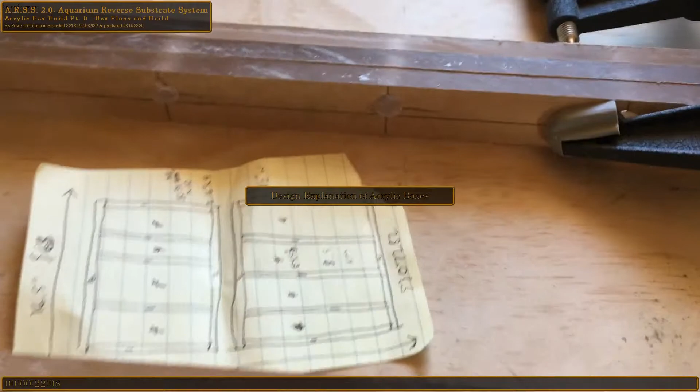Alright, A.R.S.S 1.0 failed. The silicone seams busted on the aquarium, most likely when I put in the city water, which is 90 psi, and then a new motor turned on at the same time. It basically broke the silicone at the edge of the glass in several places, not the actual aquarium glass, but where I siliconed the screen mesh. Go back to the other videos if you want to know what that was - the first video should show you what that looked like.

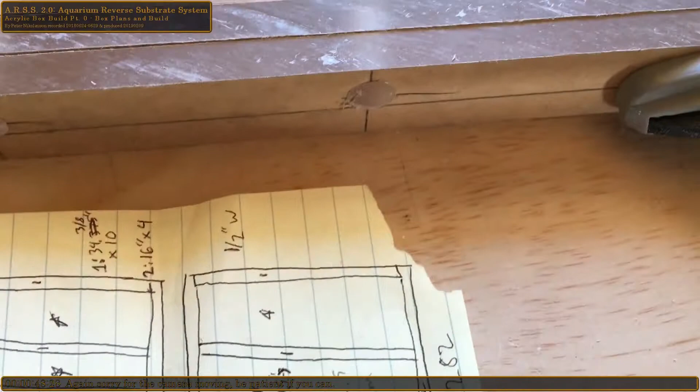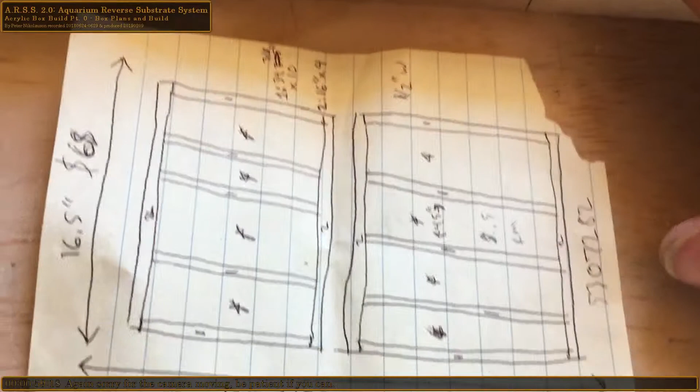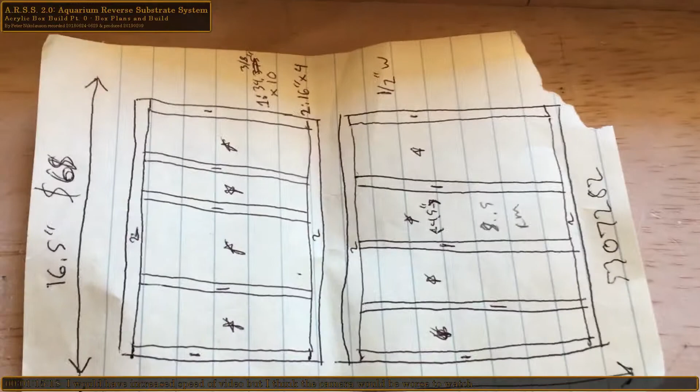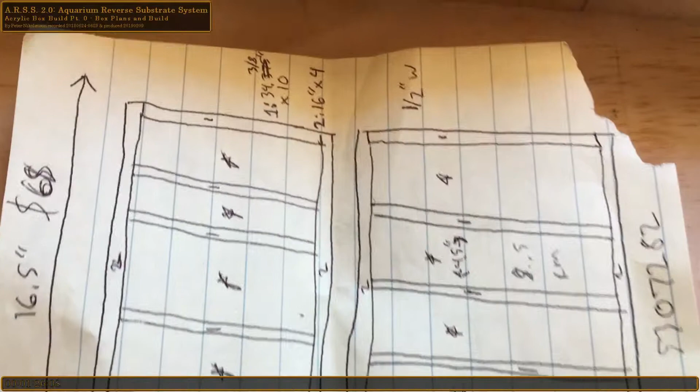So what we have going on here is we're making acrylic boxes this time. The stainless steel mesh is going to be epoxied to the top and forced through, maybe beaded on top - that's my plan to secure it. There will be two boxes with an outlet going through them. We'll have some CPVC 90s, threaded out, and we'll tee off of what's in the aquarium now into those. The outlets will be floating, meaning I can pull them out and redesign them however I want. This will allow it to be a lot more modular - how it should have been done in the first place.

So the current plan is, as we can see here, these holes are going to be on the bottom, letting water go between the four chambers. I have the clamp over the other end, but there's a 5/8 inch hole specifically to fit a PVC pipe through. It'll be an inlet that shoots out through here, out, through here, out, and the last one will be a 90, positioned toward the back wall of the area, creating a counter current or spinning current under here.

The ultimate goal behind that is when I need to backflush this to get debris out - because the filter's not going to get everything, so detritus will get down here - I can basically connect it backwards and it will suck the aquarium water out during the water change, along with all the debris, which if it works by design will be sitting somewhere in the corner here and eventually get sucked out.

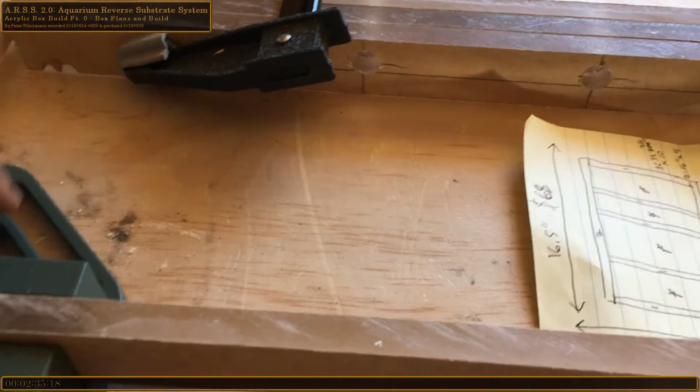So it's going to be addressing a whole lot of issues I created by rushing the project. This project's going to be semi-rushed in the finishing of it, because I have to pull the fish out, all the plants, clean up the tank. The fish will be in buckets, plants will be in buckets. My goal is to get it all done in 3 days.

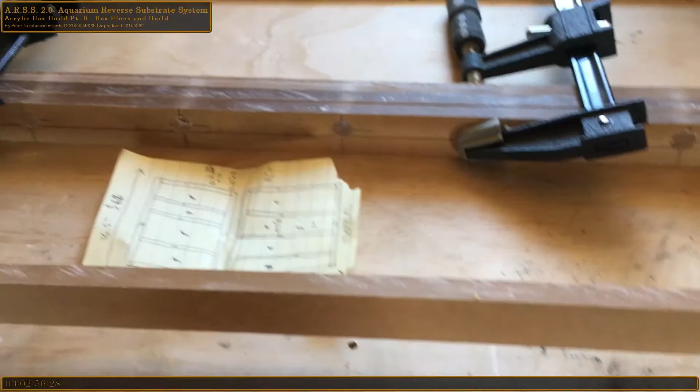So one video is going to be the design and creation process, and from then on we'll continue updating and tracking how well it works in the series. As the steps go along, I'll reveal how we're going to secure things and do things.

As of right now, we can see lots of videos on how to glue acrylic. I am not an expert by any measure, so I took some advice from a PVC plastics company that told me how to do this. I'm using acrylic cement and putting it to the edges, and the stuff does take a little longer to set than I thought.

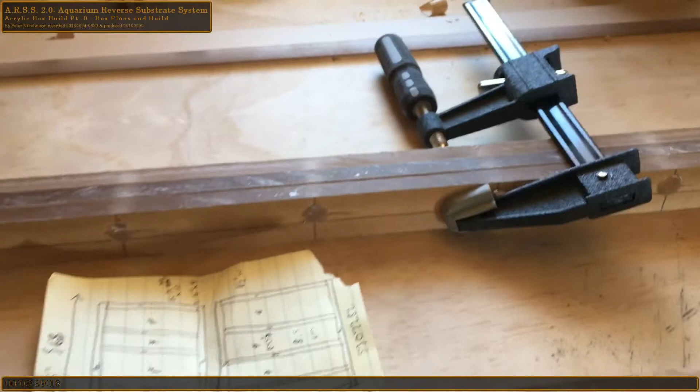So with that said, we're going to do this the right way this time around, and this video series will be dubbed A.R.S.S 2.0, and all of the other equipment will still be in place.

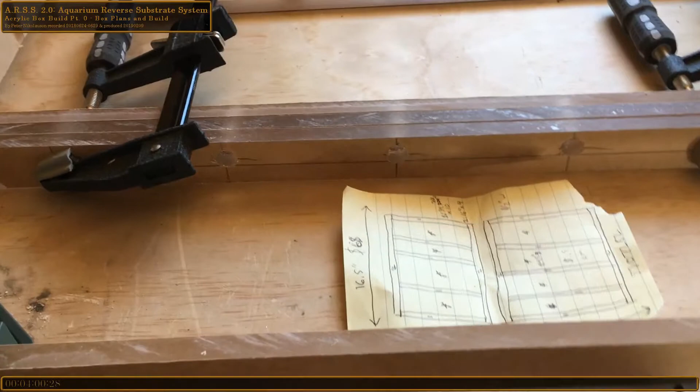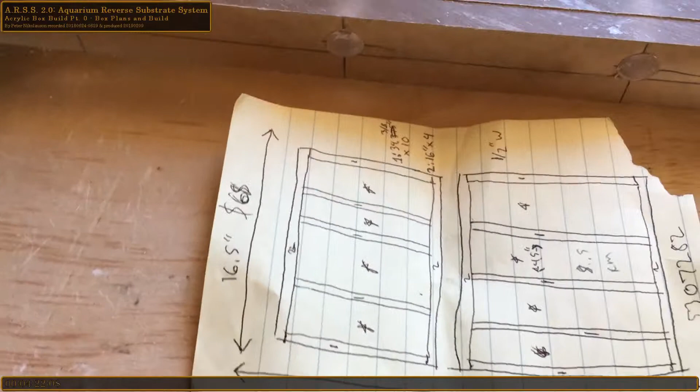One final update to the first part of this video - I'm probably going to tee off from the outlet and use it as basically a wave maker of sorts. In the drawing here, there's going to be an inlet here and an inlet here. I'm going to tee it off and maybe point a nozzle this way and one this way to create some counter current, hopefully guiding all the detritus near the outlets. There will be 4 of them on the floating design, positioned more towards the back because it seemed like the detritus wanted to go that way. It was settling against the shelved wall I put into the tank, so that's coming out - now it'll go all the way to the back, which will be a little more pleasing.

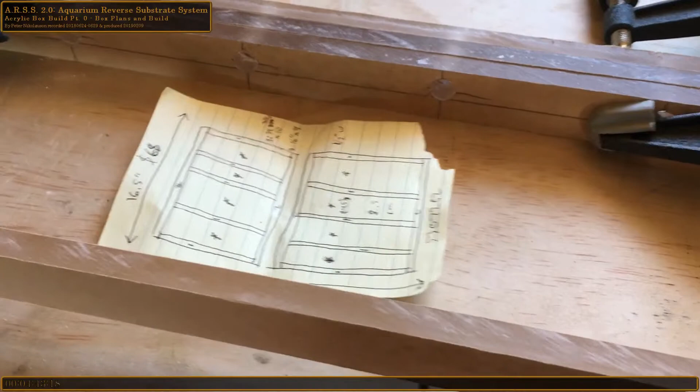So I will do several part series updates, and I'm going to glue this all up. This will take me some time. See you in a bit.

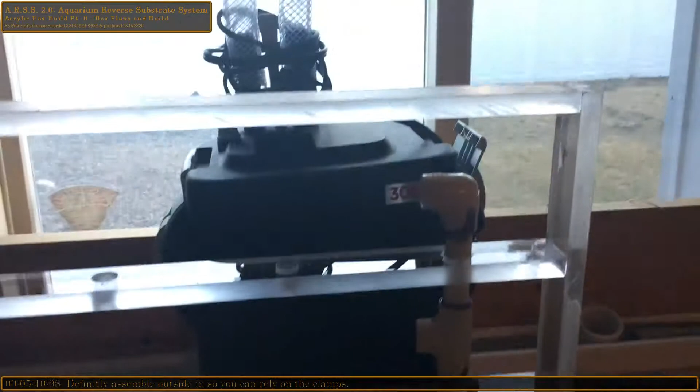Alright, they have been completed. They took approximately 2 hours, I believe. I had to be careful with this one right here, because I already had the frame assembled, so I couldn't use my clamp there. This one was a cinch to do because I was doing it one wall at a time, and I just followed it down, and I was able to use the clamps the whole way.

So if you're doing multiple panels like I am, make sure you don't assemble the frame first, just do it as you proceed down it. It's a lot easier. I actually had one or two of these detached because I came back with some more of the...

Solution, what's it called here? The solvent that you use to bond acrylic. So I just basically would drizzle it over the edge once the bonding was done on the main seam to make sure it bonded. That's what I was doing.

And apparently without the pressure from the clamps, these weren't super attached, but they are secure. I am able to kind of pull on them without any issues. They aren't going to be supporting any kind of lateral weight, so they'll be good.

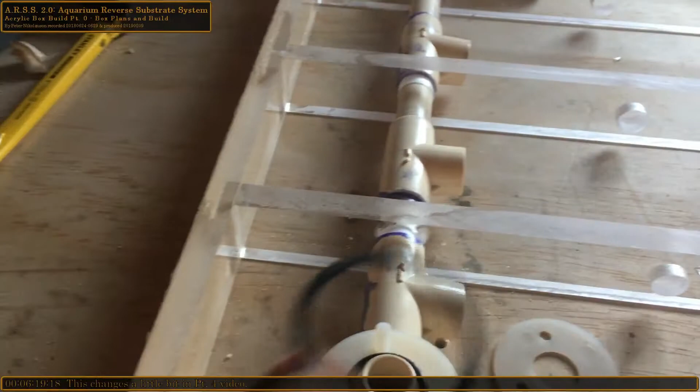Coming to here, this is the next step, the idea I came up with to basically bond the stainless steel to this. So what I did is I got 2 nylon nuts and 2 O-rings, and what's going to happen is this is going to go on top of the stainless steel mesh, and this is going to go on the bottom - hopefully, though I'm probably going to have to reverse that, so it's probably going to have to go like this. And the slip adapter...

Actually we're not doing a slip, we're doing a conversion to a 90. So once all of these are together, this is going to be press fit together, and it's going to be glued on. So once the mesh goes on, it's going to be glued into place, and then the nylon nuts are going to be twisted on, and between the 2 O-rings, my theory is I should be able to hang on to the mesh and secure itself, because it is kind of floating somewhat.

So that's basically where we're at. We are not going to be doing the mesh next. However, I will be doing the holes in the side, and what we're going to use is this guy right here. At the very end of this is, if I can read that, it's less than a quarter. I think it's 3/16 is what it says.

So I'm going to go to the very tip about halfway to make sure it's a good solid hole, and however far in that goes, it looks like it's going to come out to - where's the camera? I don't know if we can read that. We sort of can - 3/8 inch hole roughly, and I'm going to do these about every inch or so. Theory is it's going to be kind of a cone-sized hole, and it should cause some water turbulation on the outside.

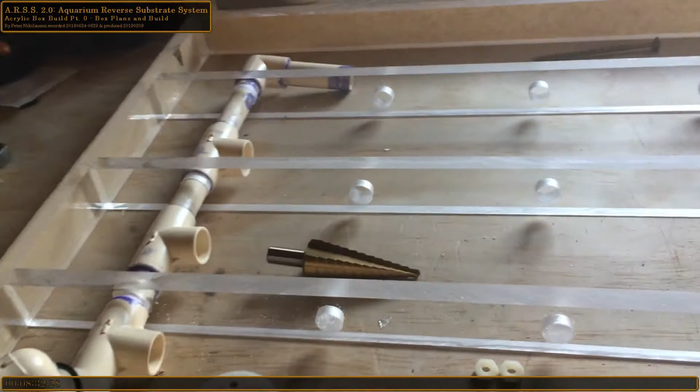I think that's all we kind of got. So this is basically the outlet design. This is all just outlets. I'm not terribly concerned about how much water is going to come out of which hole - that's the whole point of these guys. So as pressure is met in one spot or another, the water will fill in.

My theory is I'm going to be able to run my whole system at 60% of 15,000 liters per hour without causing any issues to the sand. I have cranked the pump up as it is now, and it hasn't moved the sand hardly at all. Right now it is about 50-60%, but that's with 2 holes in the silicone seal.

So on to the next step. I will check back in.

Alright, a little quick update. I'm getting ready to drill the holes to what we specified earlier. So basically I'm doing about an inch in between. I don't think this is going to be too many holes, especially considering they start narrow and then they go out, and I can always just turn the pump up a little bit.

As the edges will kind of just - there'll be enough sand there, there should be enough to hold it down, I hope. If not, I'm sure I can just cram something down in there and block the holes off, and they won't be useful anymore if I do that. So I'm going to get prepped to drilling. There's going to be something like 30 holes on the sides and 9 or 12 total on the ends, and that's going to be kind of where we're at. I'll be back in a bit.

So I did the first hole. We're just going to take a quick look here. So it kind of looks large. Let's see what we got.

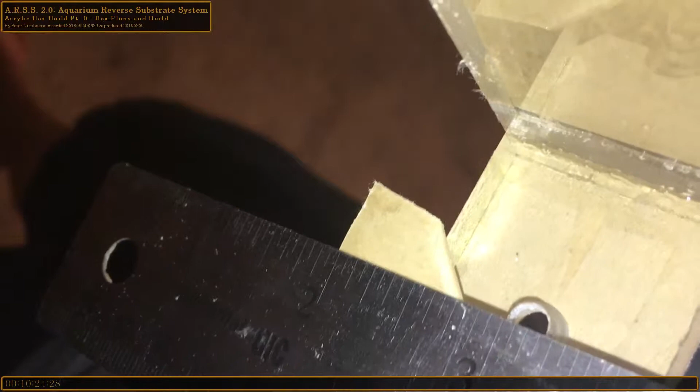Alright, so we went to a 1/4 inch there, and the hole back here looks to be about 3/16. So visually, this to me kind of seems a little on the large side.

I think I'm still going to do the cones. I'm going to drill the cones, but I think I'm going to take a normal drill bit and go in there at 1/8. I don't think I'm going to do it at the 3/16 size, it seems a little large to me. So that's going to be the update. We're just going to do a two-parter because it might affect the actual overall flow on the top side. I also wandered off my grid too quite a bit.

Let me show on it. Alrighty.

Okay, regarding the holes in the side, I'm just going to show you guys the one that I finished. This took somewhere around 30-40 minutes. There's a lot of drilling.

There's a couple things that I have learned, because I was told by the acrylic guy that you cannot, or should not I should say, take this guy and run him at high speed because it has to slowly cut. I basically did that with 4 holes. I figured it was too slow, so I decided to chance it, and lo and behold, come to find out, it works very, very well at high speed.

What I did is basically I just used the light on my drill motor, and I just kind of stopped right about here, give or take. And then from there I went in with a 1/8 inch bit, and that was super easy, it wasn't too hard.

One thing I could definitely say about acrylic projects is they look super sharp. Like this thing looks really, really amazing. It's too bad that it's going to be buried with a whole bunch of sand where you can't see it. Maybe I'll put a light under my tank and take a glance at it every now and then, but I pressed on this while I was drilling sometimes, flexed it, nothing cracked, nothing broke. I didn't detect any abnormal heat in the drilling process using the stepper bit.

So I suppose if you were to drill sump holes for sump piping, you probably could do it with a stepper bit if you had one that was big enough. I don't see why it wouldn't work, but I do believe the hole saw would more likely be a little more accurate. Or what I used to do these with a drill motor was a Forstner bit, and that's what I was told to use to drill acrylic.

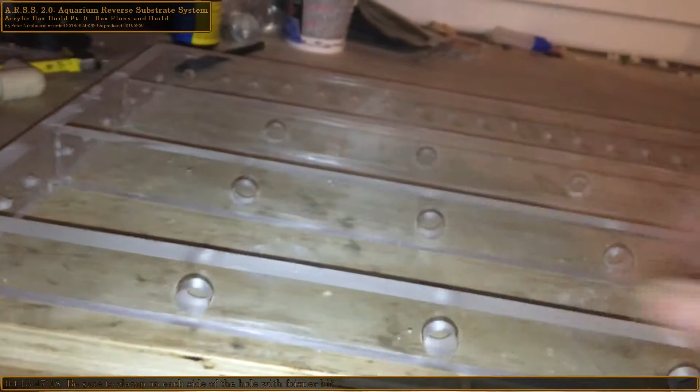I could use a stepper, but I used a drill press a buddy of mine had, and I went over there and we drilled these up. The Forstner bit did really well. There were some exceptions where we didn't clamp right next to where the holes were at, so some of the plastic built up and it basically popped out a little bit. So every now and then there's a couple of these that will have a hole blown out the back, just partially. Otherwise, regarding step 2 of this, part of the glare, this actually looks really, really good.

For a first time ever working with acrylic, I'm actually quite proud of how well I'm doing. I did, on the safe side like I mentioned before, used extra cement on these, and so I actually got a little bit of this extra cement effect where I got to kind of sand this down.

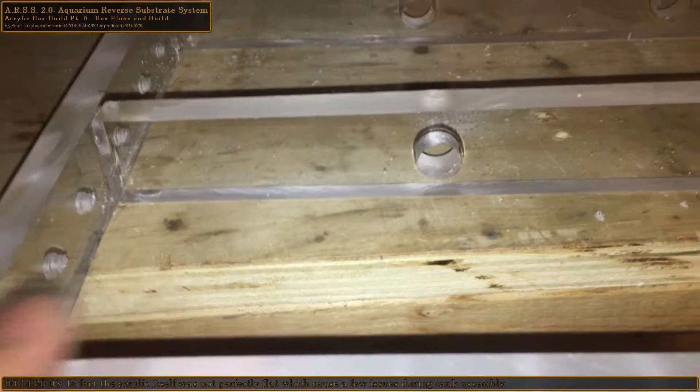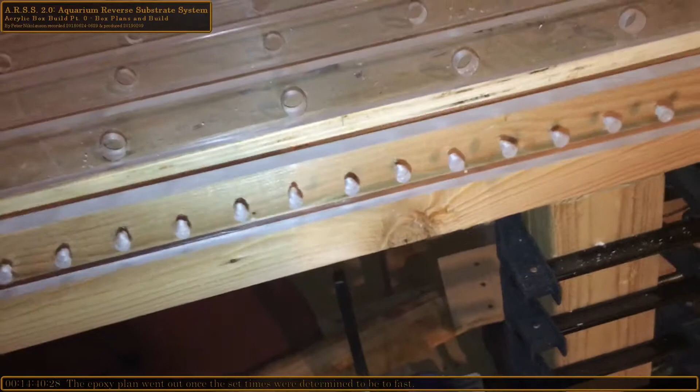So I'm going to sand it down smooth, and then I'm going to rough it back up, if that makes any sense. But I need to do that to epoxy the stainless steel mesh to this, and I do have the edge guard, which is a polycarbonate I believe, edge guard that'll go all the way around. And I'm going to use a hole punch tool like that to punch holes into the mesh.

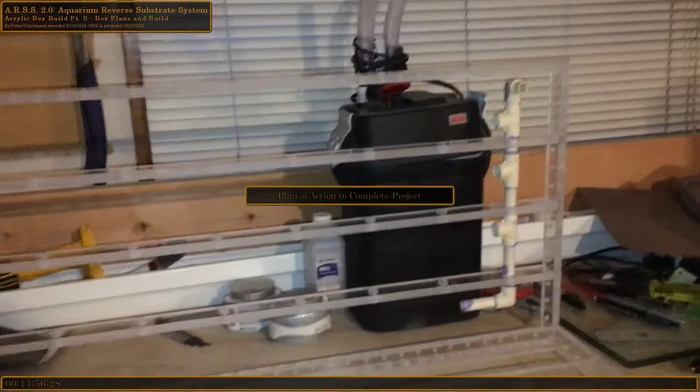In between time, it's going to be about a week or two before I get to this part. It's going to be a lot of work. So with work right now, I have a lot of craziness going on. So before I do an insane project like this, I want to make sure I have some dedicated nights. I'm not coming home at 10 o'clock at night doing work.

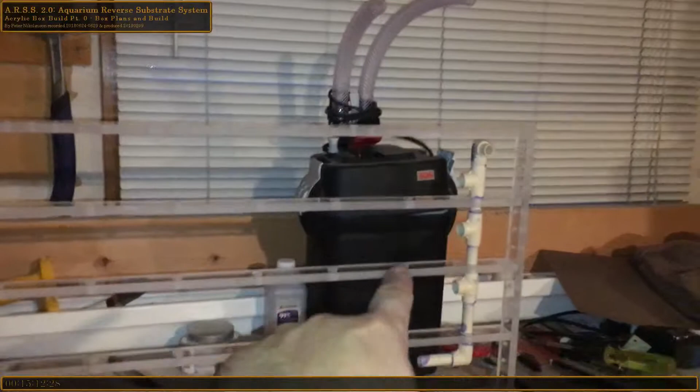So we're going to get the quarantine trash can put together with the 306, some media that's already seasoned from the aquarium that I'm going to do a water change tomorrow on. So I'm going to set this up, probably not in the house, but I'll put it out here for now. And that is the trash can. It's 35 gallons, and it will be getting half water changes most likely daily. My goal is 3 days to get this all put together.